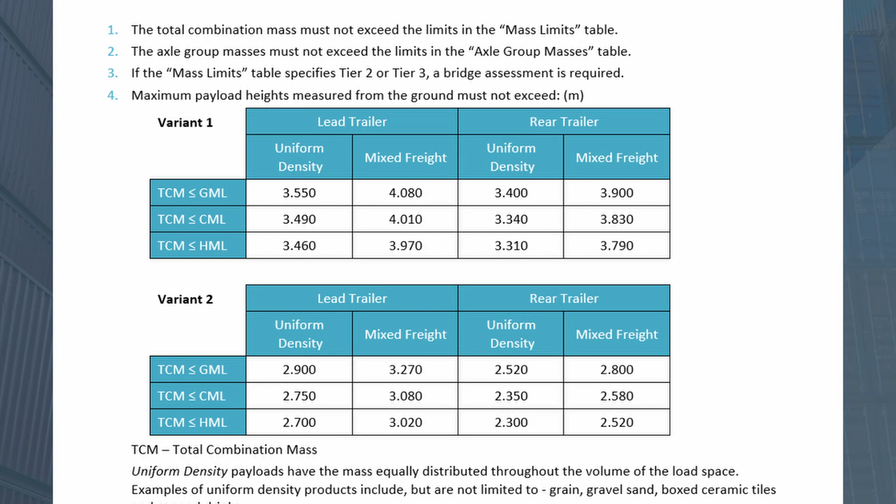A payload management procedure, also known as a PMP, is a document that shows comprehension and compliance with the design approval's payload height restrictions. It's a condition for PBS vehicles where the payload height is difficult to be verified by roadside compliance officers. This is typical for A-doubles carrying shipping containers, but can also be applicable to other vehicles and load types. A PMP is required if the following operating condition appears on your design approval.

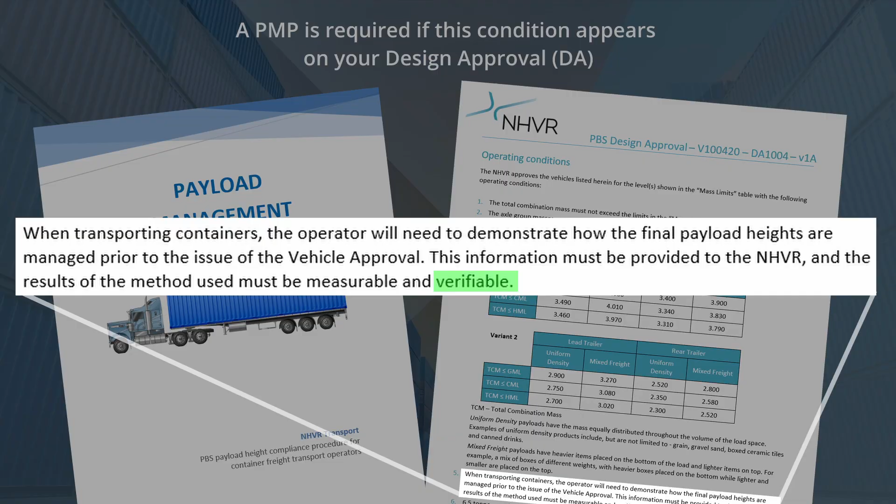The operator will need to demonstrate how the final payload heights are managed prior to the issue of the vehicle approval. This information must be provided to NHVR and the results of the method used must be measurable and verifiable. This condition requires a PMP to be completed before a vehicle approval or a VA can be issued. Drivers must keep a copy of their PMP and VA in their possession and be able to produce them if requested by a compliance officer.

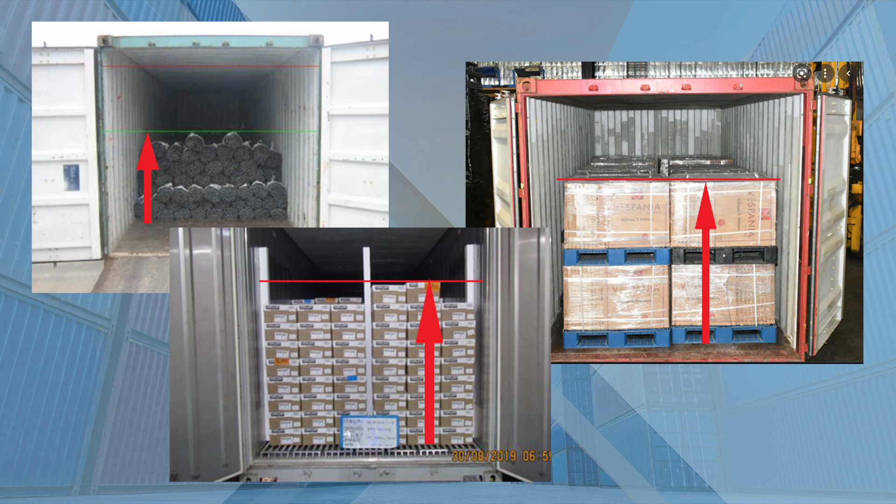Certain PBS vehicle combinations require a restriction on the maximum payload height to ensure safe operation and compliance with the PBS requirements for rollover stability. Please note, if a vehicle requires a load height restriction, containers with unknown load heights must be transported on another vehicle. A vehicle's rollover stability is a key safety measure, as crashes that involve heavy vehicle rollovers are strongly associated with severe injury and fatalities.

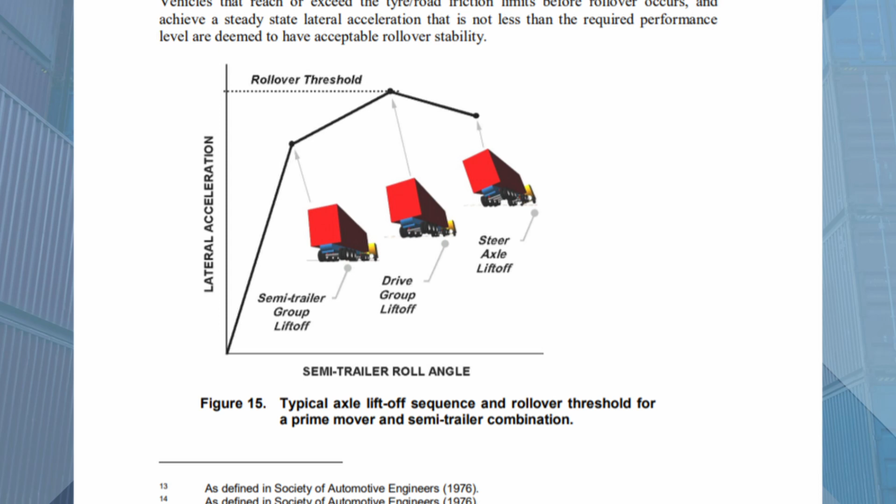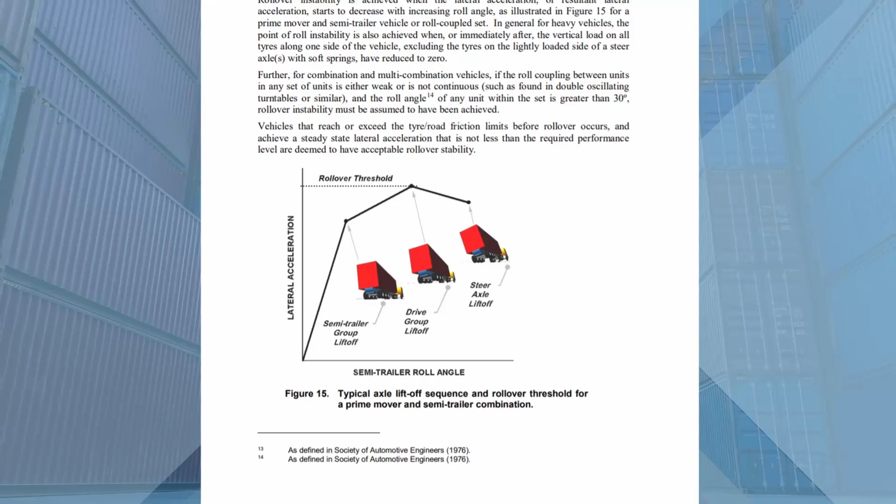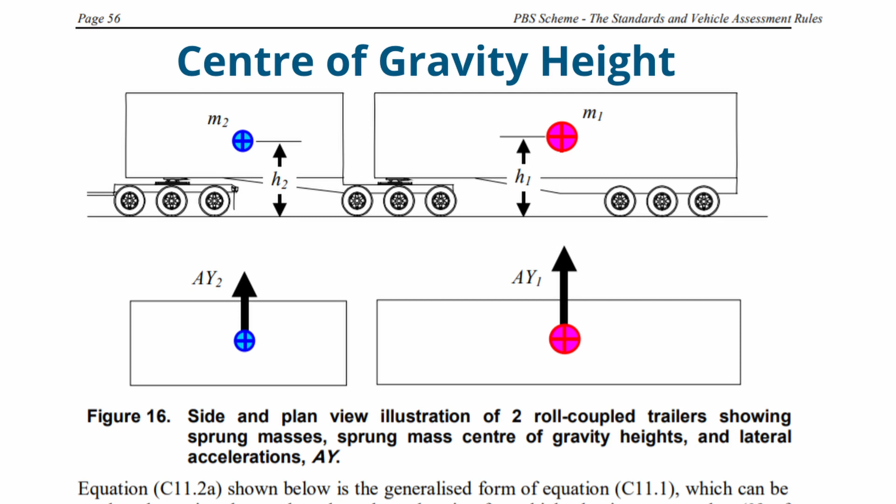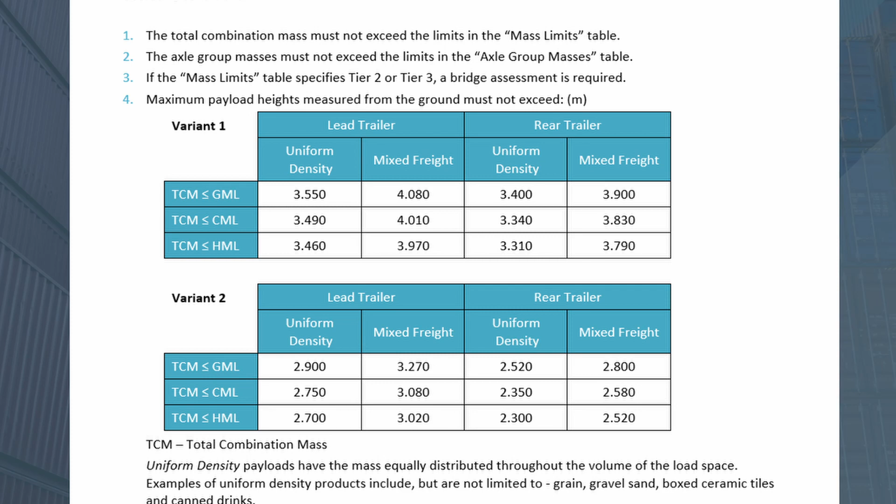The rollover stability is sensitive to the track width and center of gravity height of the vehicle. The suspension properties of the vehicle also influence rollover, but are less important when compared to the track width and center of gravity height. As the center of gravity height increases, the likelihood of vehicle rollover also increases. The payload height directly affects the vehicle's center of gravity height and is defined in the design approval to ensure the vehicle operates within its rollover stability threshold.

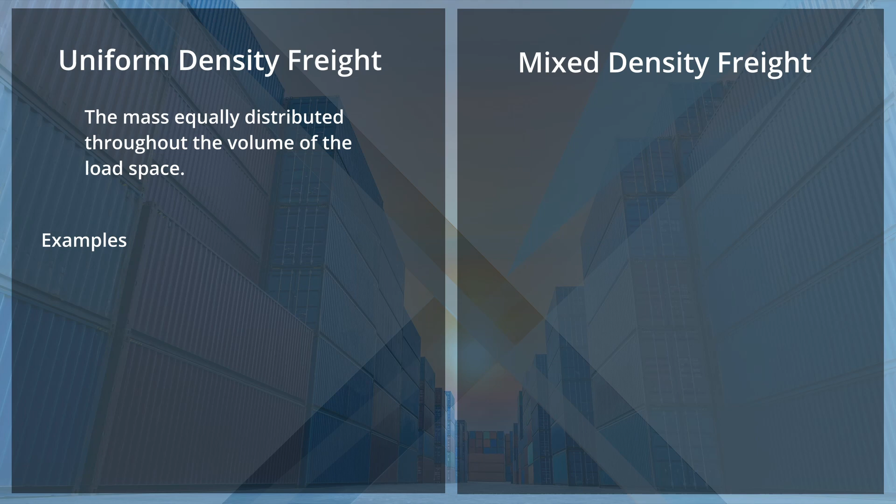The load type is another factor that has influence on the vehicle's stability and is often split into two types of freight: uniform density and mixed density freight. Uniform density payloads have their mass equally distributed throughout the volume of the load space. Examples of products include, but are not limited to, grain, gravel, sand, boxed ceramic tiles, and canned drinks. Uniform density assumes the center of gravity height is at the centroid of the load.

Mixed freight is a general type of payload with heavier items placed on the bottom of the load and lighter items placed on top. For example, palletized grocery loads where canned foods and soft drinks are stacked on the bottom, with biscuits and toilet paper stacked on top. Mixed density freight assumes the center of gravity height is approximately 40% of the load height. Because of the difference in center of gravity height between uniform and mixed density payloads, uniform density loads will typically have lower height limits compared with mixed freight loads.

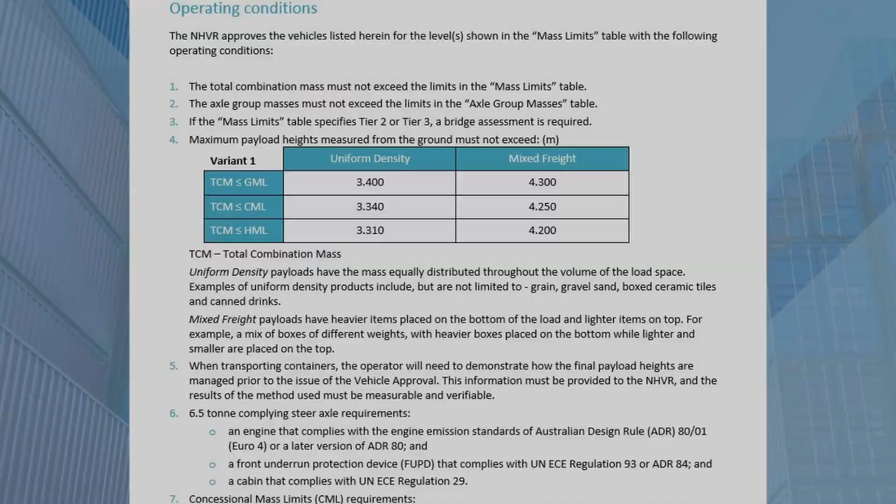Please note that load height limits are usually different for GML, CML, and HML. These height differences correspond to the mass for each scheme. As GML masses are the lightest, they are usually allowed higher payload heights compared to CML and HML. It's important to be fully aware of these differences, as both the height and mass must be taken into consideration to be fully compliant.

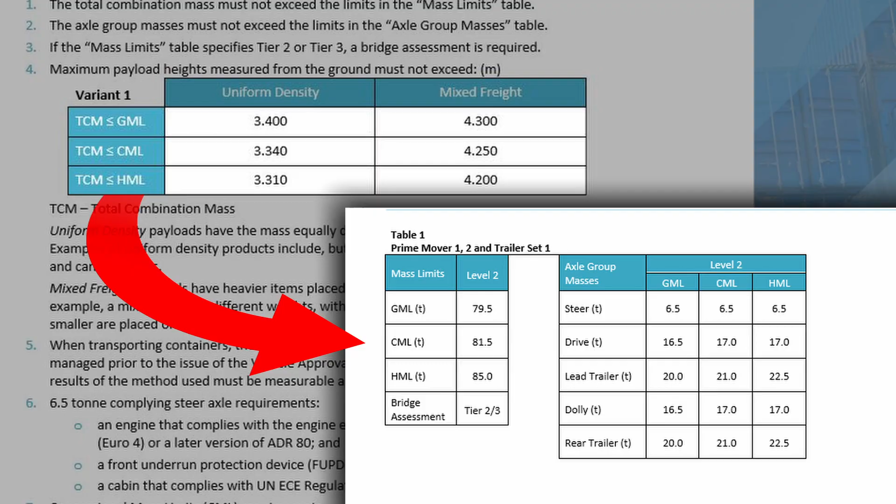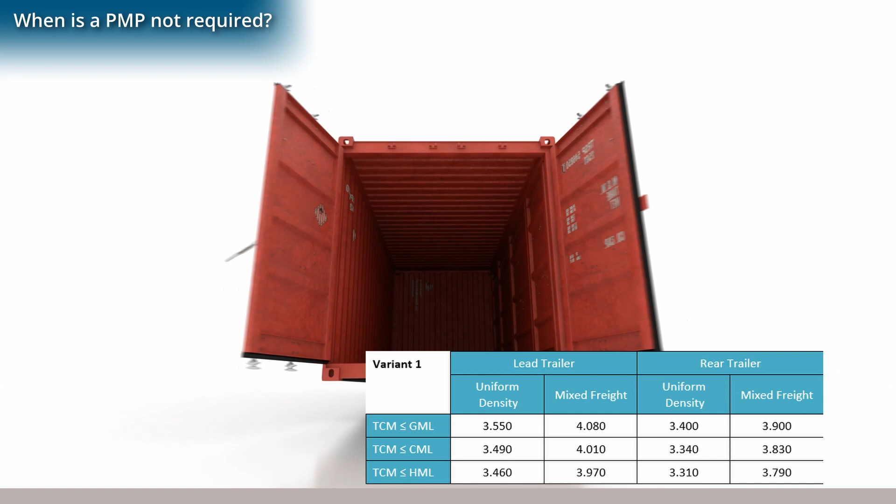A PMP document is not required when the maximum load height specified in the PBS Design Approval is within 150 mm of the vehicle's overall height. This 150 mm allowance is to accommodate for the top rail at the door opening of the container, and for a workable space in packing the container. So for vehicles 4.3 meters high, with payload heights of 4.15 meters and above, a PMP is not required.

Sometimes operators may be transporting mixed density freight loads only. As some vehicle design approvals don't have height restrictions for mixed freight loads, a PMP may not be required. This means the VA will be issued allowing mixed density freight loads only. When PBS certifications are submitted to NHVR, the PBS certifier should advise that only mixed density freight is being used.

All that will be required is a single-page declaration stating that only mixed freight is being used, with definitions for both uniform and mixed freight. This should then be submitted to NHVR at the time of certification. Please note that the VA cannot be issued until a declaration or PMP is submitted.

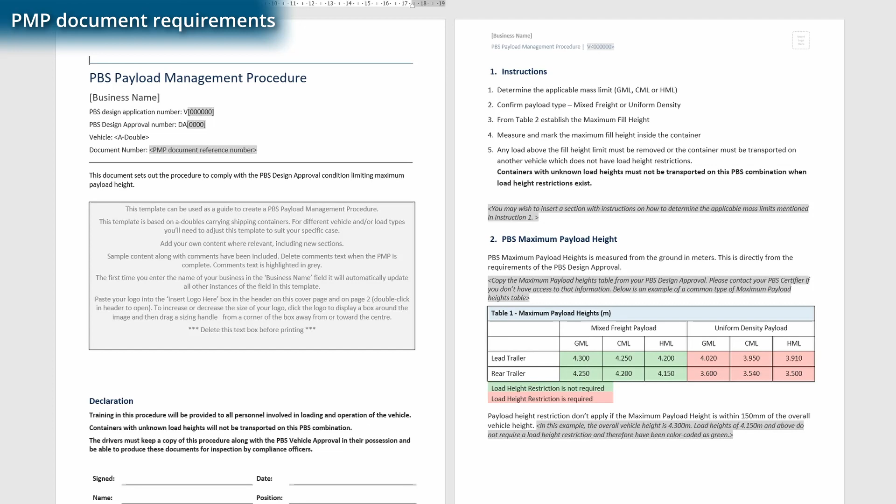The procedure must contain the following information and demonstrate how the payload heights will be achieved and maintained. To meet these requirements, we've made a template document available on our website. This should be modified to suit your specific needs, and the grey worded section should be deleted once complete.

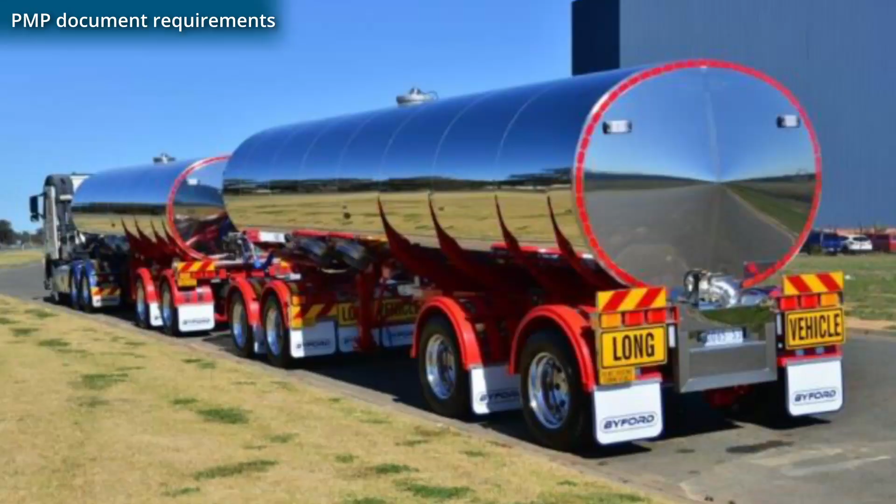Please note, two example templates have been made available for use, one for container vehicles and another for tankers. The following example will be for container vehicles. If you require a PMP for a tanker, then please refer to the tanker template, as this will refer to fill heights and compartment capacity limits instead of payload height limits.

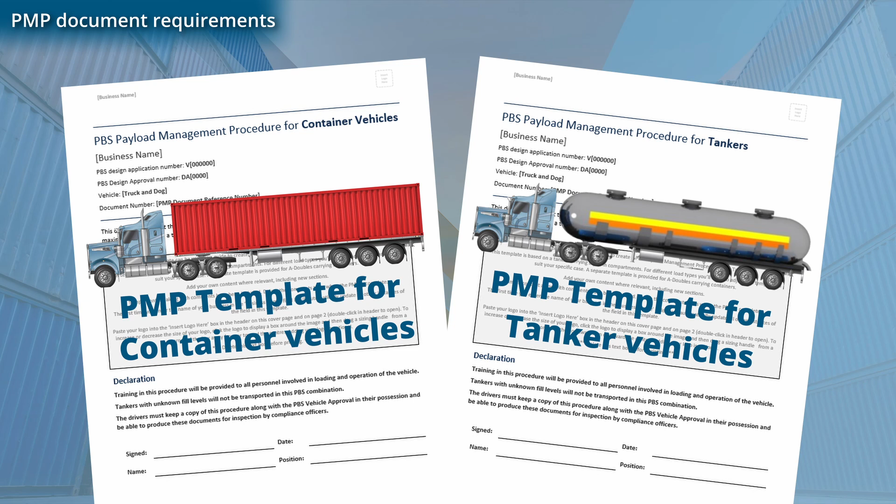These templates are voluntary to use, and you can come up with your own. The templates have been designed as a guide to help operators meet the necessary requirements needed for a PMP. The PMP document must identify the transport operator's business name, the PBS application number, which is a 6-digit V number as shown on the design approval, the DA number, which is a 4-digit number also shown on the design approval. The vehicle type must also be listed, and it must also contain a unique document number.

If you aren't aware of this information, please see your PBS certifier or the vehicle manufacturer, as they will have a copy of the design approval document. The PMP must be signed and dated by an authorised person, with a declaration stating that all personnel involved in the loading and operation of the vehicle have been made aware of the payload height restrictions and training will be provided. The procedure must include instructions for container loading personnel outlining practical steps to load the container below the correct payload height limits. Instructions should include similar steps to the following example.

1. Determine the applicable mass limit, either GML, CML or HML. 2. Confirm the applicable payload type, either mixed freight or uniform density freight. 3. Establish the maximum fill height limit, determined by the mass limit and the payload type being used. 4. Measure and mark the fill height limit inside the container. 5. Any load above the fill height limit must be removed, or the container must be transported on another vehicle which does not have load height restrictions.

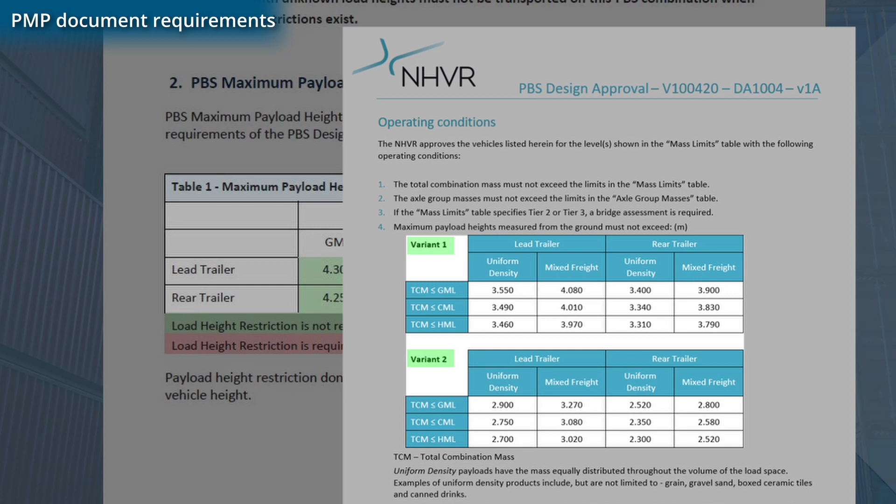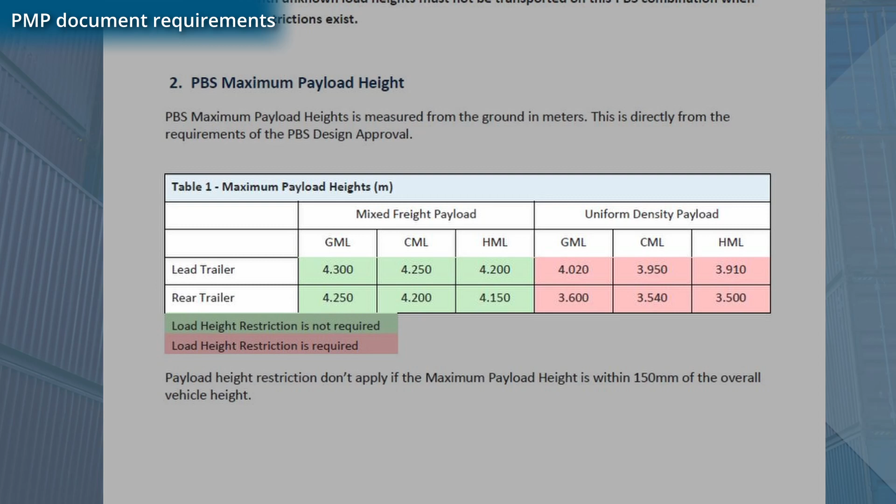The PMP must contain a table of the maximum payload heights as shown on the design approval. When determining these values, please ensure you are using the correct variant, as some design approvals will contain several variants with different payload heights for each different design. As discussed earlier, load height restrictions do not apply if they are within 150 mm of the vehicle's overall height. This example shows unrestricted loads in green and restricted load height values in red.

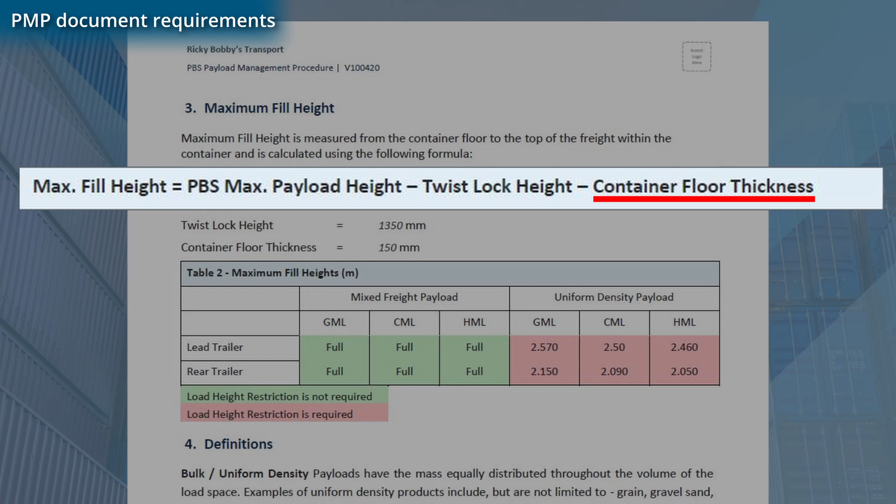Next, the maximum fill heights in the container must be determined. The procedure must clearly state how the heights were derived and the calculation shown. Details of how the fill height is calculated in the table should look something similar to the following. Max fill height equals the PBS max payload height minus the twist lock height minus the container floor thickness, where the PBS max payload height are the values as per the PBS design approval. The twist lock height is the height from the ground to the height of the twist locks where the container sits, and the container floor thickness is the depth of the container floor where the container sits on the trailer twist locks to the floor of the container where the load is placed.

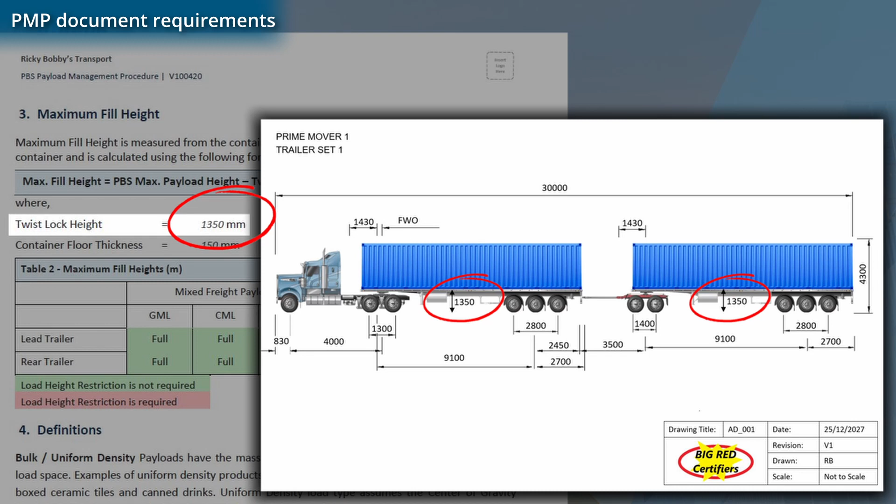Values will need to be specified for the twist lock height and the container floor thickness. The twist lock height will typically be determined by the certifier as they will be measuring your vehicle, and values should match those in the vehicle diagram supplied by the certifier or the manufacturer. The fill height table should show each fill height for the applicable freight type and mass scheme. Finally, definitions for the different load types, payload heights and mass schemes need to be stated. We discussed the definitions for uniform density and mixed density freight earlier, so feel free to rewind if you need a refresher.

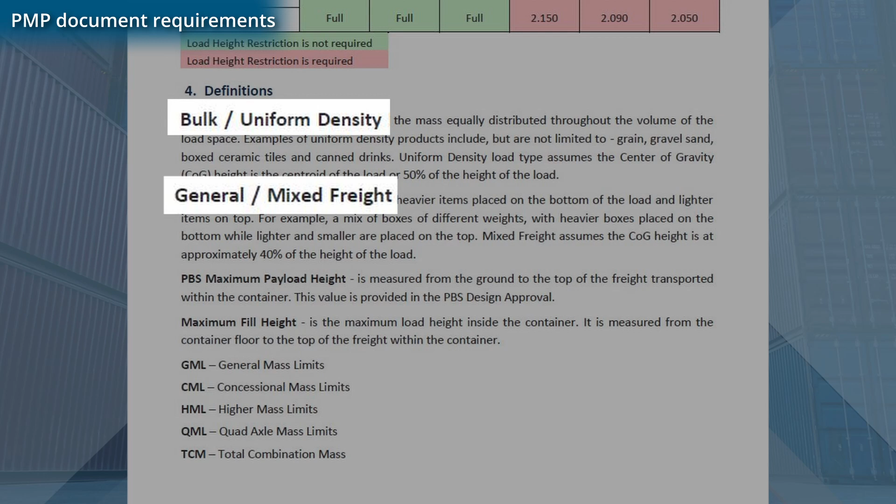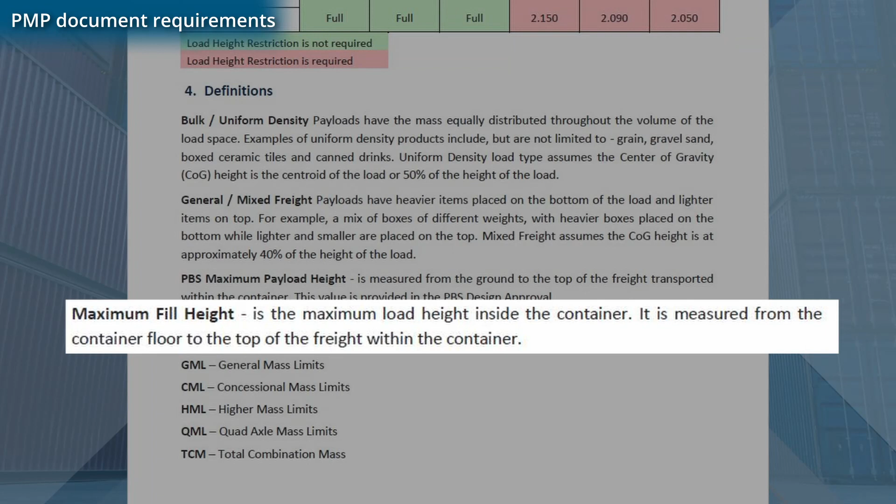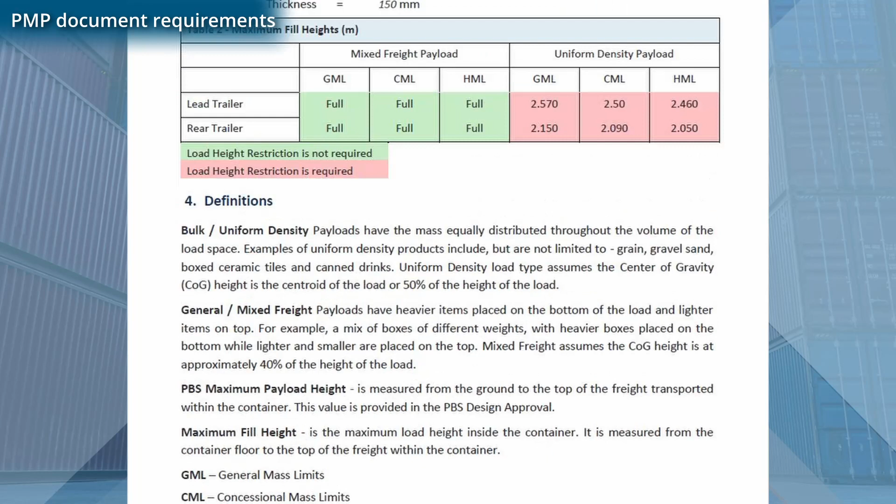The PBS maximum payload height is measured from the ground to the top of the freight transported within a container and is found on the PBS design approval. The maximum fill height is the load height within the container and is measured from the container floor to the top of the load within the container. For each of the relevant mass schemes, definitions can be as simple as stating the abbreviations in full. Photos and diagrams are also helpful to be included on the document and are highly recommended. Please note that as you complete this template, it can be modified to add additional procedures and information as you see fit to suit your specific business needs.

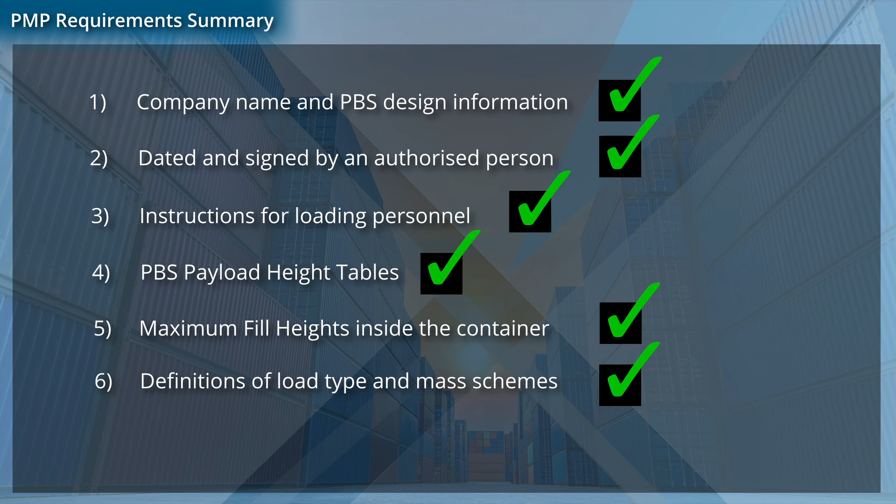So just to summarise each section, the PMP must contain the company name and PBS design information, must be dated and signed by an authorised person, must include instructions for loading personnel, PBS payload heights, the maximum fill heights inside the container, definitions of load type and mass schemes. Photos and diagrams are optional, but highly recommended.

The chain of responsibility law ensures everyone who works with heavy vehicles, from the businesses that employ drivers to the place where goods are delivered, is accountable for safety. It's your responsibility to do everything you can to make your transport work actions safe. A PMP document serves as evidence of the operator's awareness and importance of payload height restrictions on PBS vehicles. It's a risk management tool and communication device through the chain of responsibility. Transport operators who use PBS vehicles are responsible for ensuring that all parties involved in the loading of their vehicles are aware of these requirements.